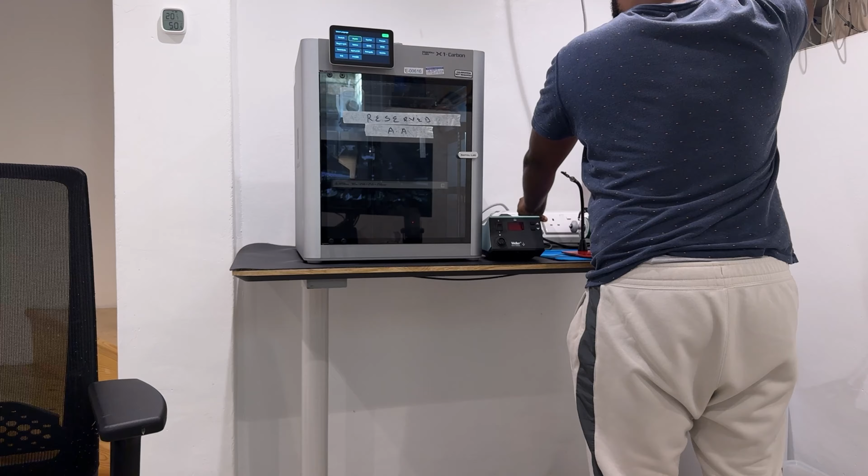So now we're just about done with the setup. You can kind of see the scope of what I've been able to score. So I've got a Bambu Lab X1 Carbon. And then there's also a Weller soldering station there. There's a multimeter and some other bits and bobs. So this will allow me to mess about in the basement a little bit and try and create some interesting projects coming soon. So right now, before we can start printing anything, we're going to jump into Onshape and design a chute for this 3D printer to collect the excess filament.

So it's all set up. So got a soldering station there, some solder, some jumper cables, a soldering mat, the mat and the table mat I bought on Amazon, the power supply. Initially, it was there, but it was a bit of a mess, so I've just moved a few things around. And then the 3D printer.

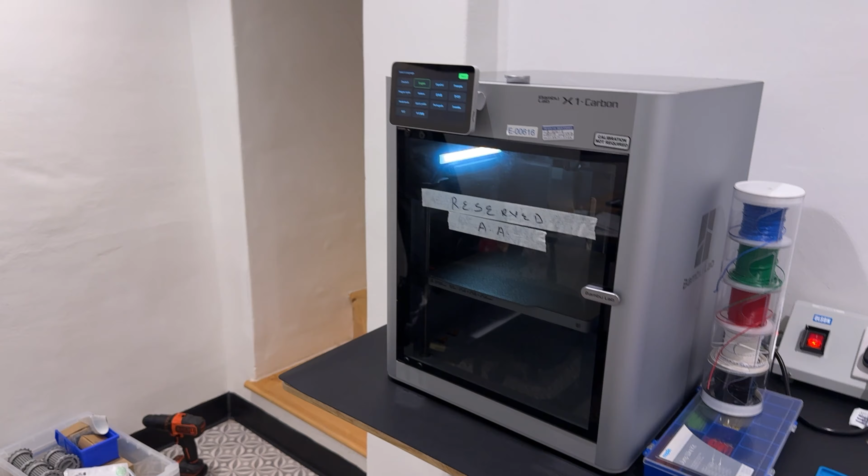So what I'm going to do now is set this up on the home network, but before this can run, I need to design a few things for it. I need to design a chute for the poop, for the excess filament that comes out of the back. So I need to design that, and I also want to design a bracket for this so it doesn't kind of flop up and down anytime I try to plug into it. So let's jump into Onshape now and do designs for this.

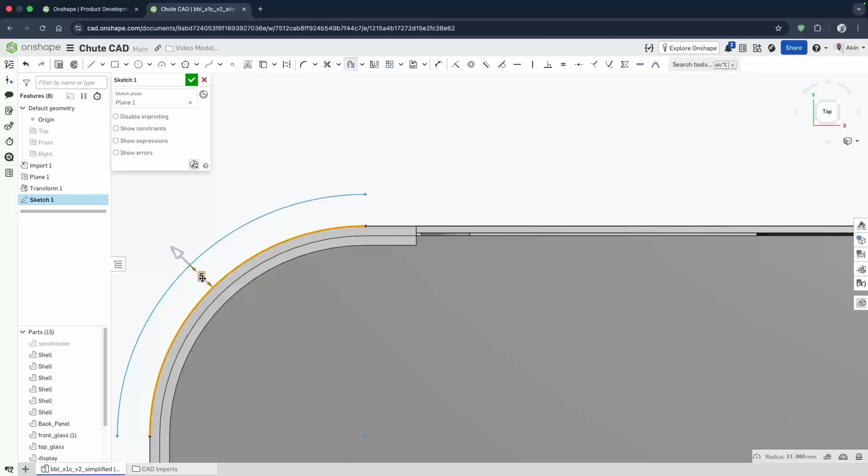In the meantime, I'm going to set this up so that I can run on the home network and fire up some test prints while we're designing in Onshape.

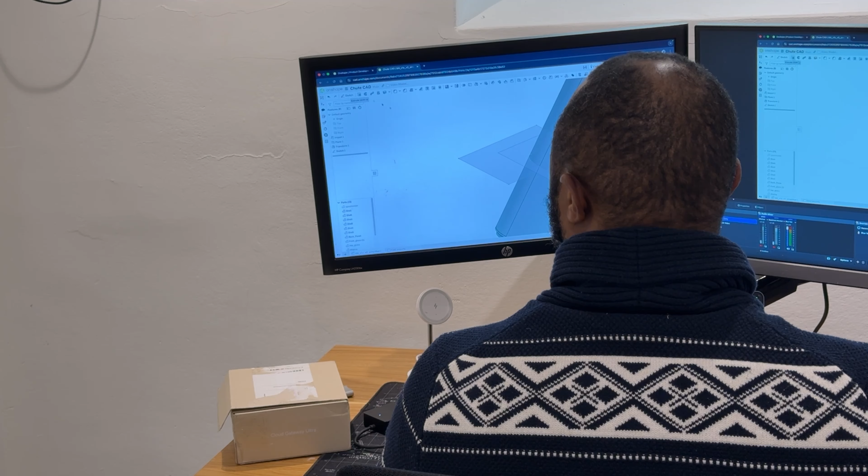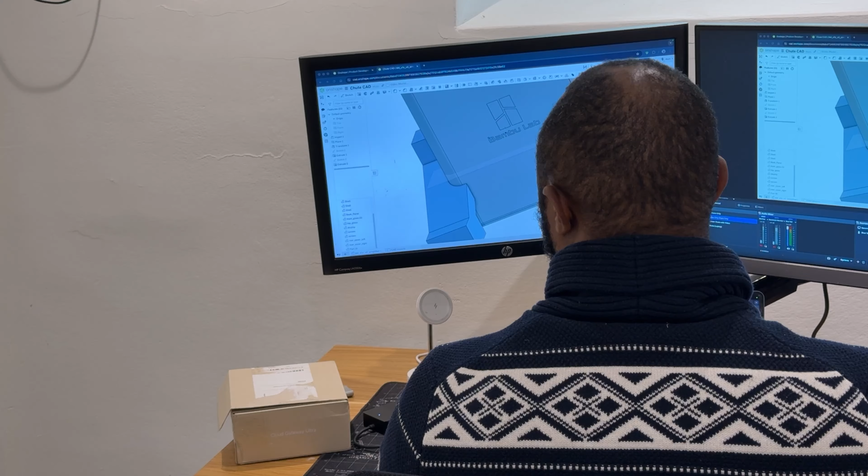So what you're watching me do here is create one of the 2 CAD designs that we needed to create for this new table setup. So this is for the chute at the back of the printer that collects the excess filament. This is, I would say, probably the least interesting of the 2. The CAD for the bracket for the power supply was actually a lot more interesting, as I applied a lot of the concepts that I've talked about in my previous videos in that. So stay tuned. That's coming along.

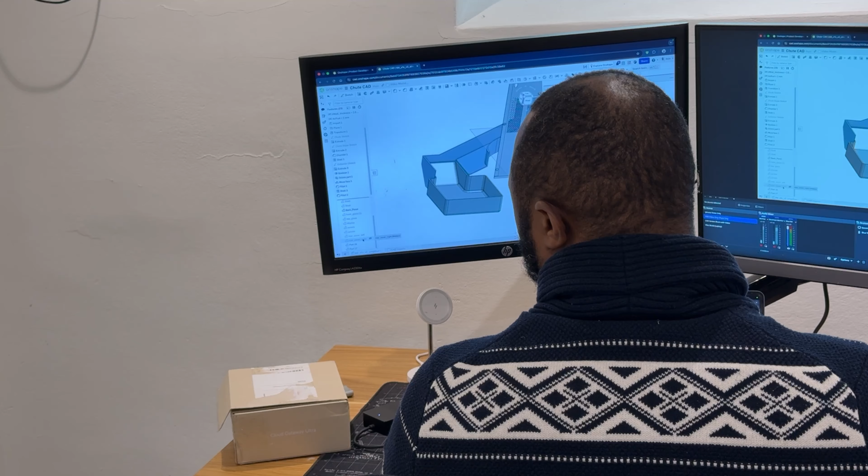But let me let you watch me vibe CAD these, as I was making a lot of it up as I went along here. I'm going to release a standalone video on this, as well as a standalone video on the power supply bracket, coming on the channel.

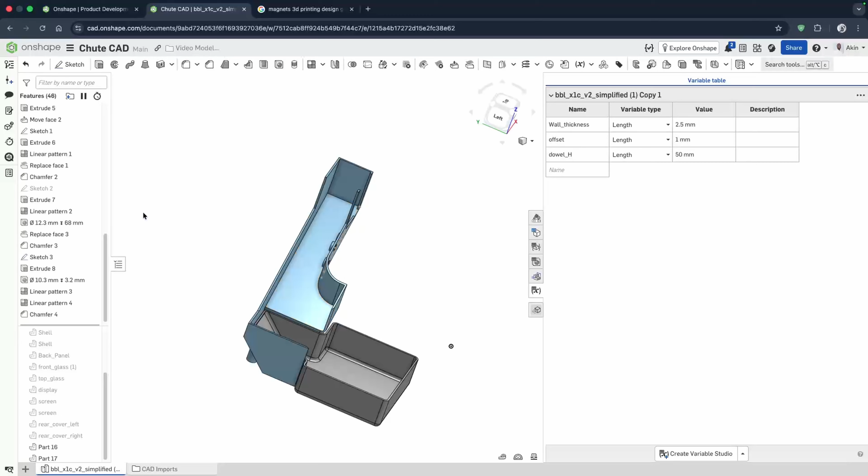But in terms of the design itself, what you're seeing here is just the 3 holes for the magnets that allow it to magnetically connect to the back of the printer. The design itself is in 2 pieces, so there's a chute part where the excess filament slides on. There's like a collector basket at the bottom of it, and there's a dowel pin right in the middle of the collector basket that aligns that properly.

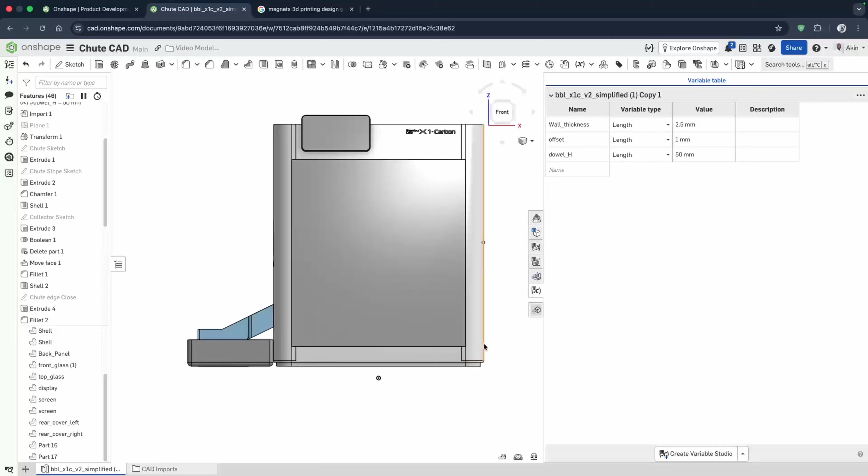One thing I'll say here is that perhaps the circular magnet hole is not the best. You probably want something that's hexagonal because of just how this prints, as there's a seam that makes the magnet always kind of difficult to go in. But at this point, I thought I was done, except

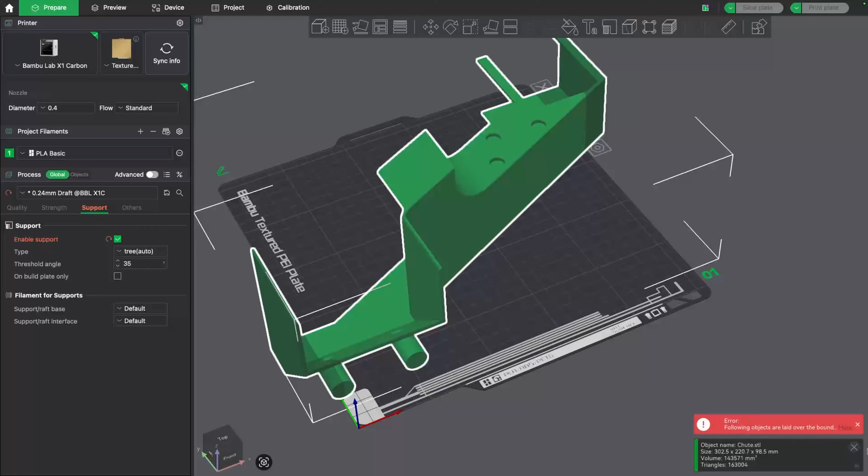I wasn't. So lo and behold, I put this into the Bambu slicer and then realized it's too big. I couldn't actually fit it onto the plate, which is one of the things I've begun to notice about this printer: it's actually quite small compared to the H2D out there, which is a newer model that Bambu Lab sells. So what I'm going to do now is jump back into the CAD and try and split this into two, and then print that as a two-piecer.

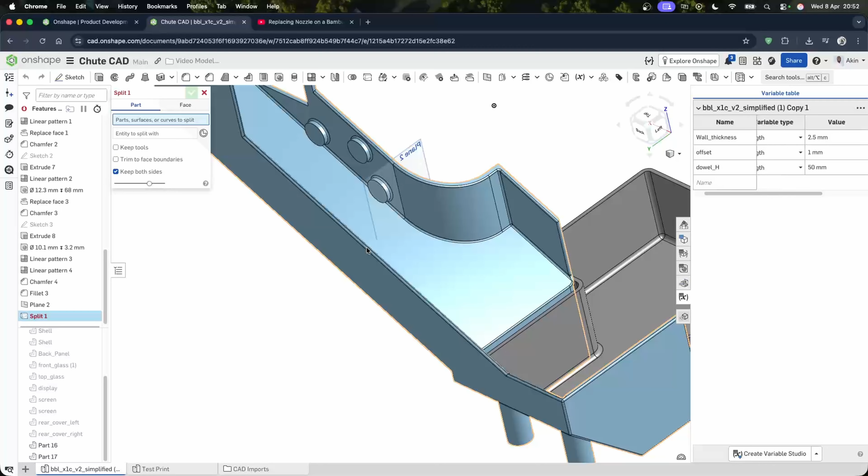So what I'm doing now is adding a plane to where I want this to split. I actually kind of like this feature with Onshape now where you can select what you want, and the system guesses what you're trying to do, because I could never figure out which options to select when I'm selecting planes. So now that that's done, I'm going to use the split part feature right here, using the plane as a split point to split that part into two.

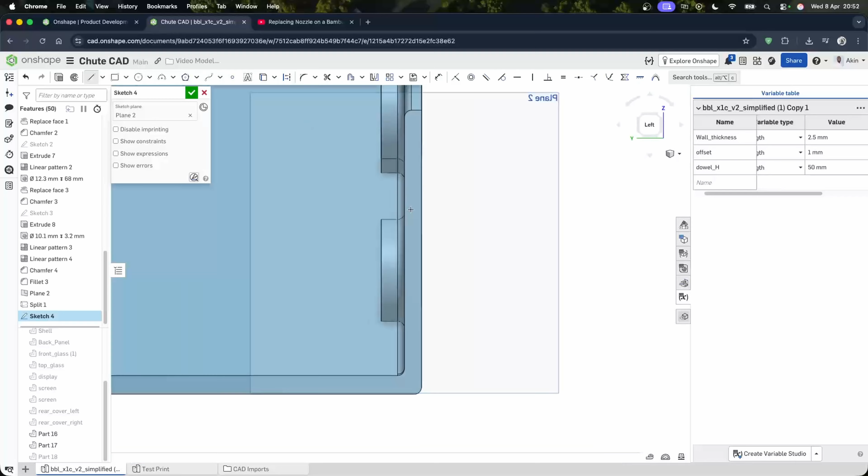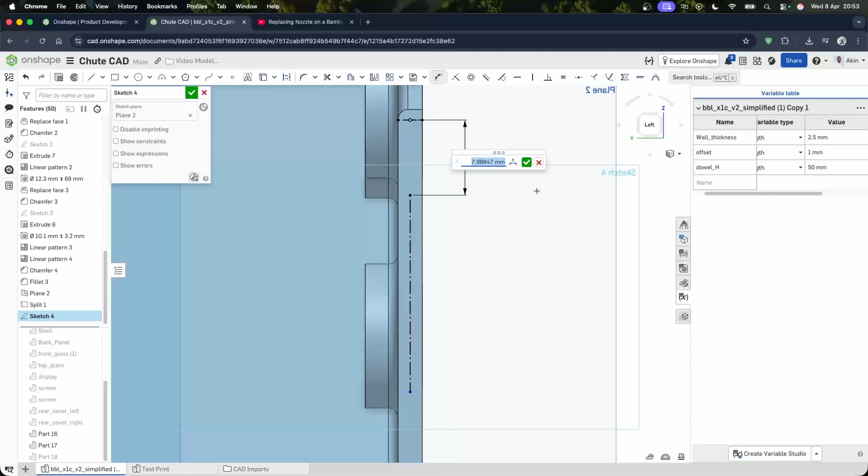So the next thing I'm going to do is put a sketch on that face. I'm creating a slot here, like a dowel slot, so there will be a male on one side and a female on the other side, which allows me to join this together temporarily until I'm able to glue it. So it serves as the attachment point. So I'm creating that geometry now, and then constraining and dimensioning, as I always say on this channel.

I'm watching you. Constrain your sketches. I don't want to see no blue dots, no blue ticks, nothing on your sketches, unless they are like letters, alphabets, other things. In that case, it is acceptable for you to not constrain your sketches.

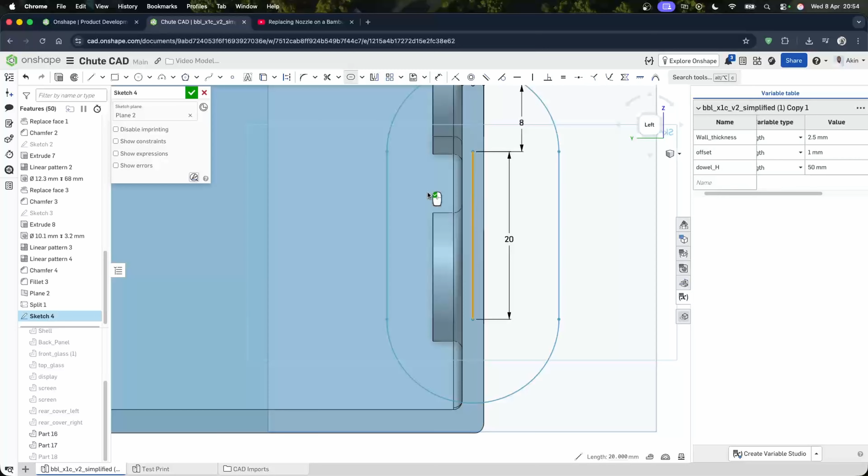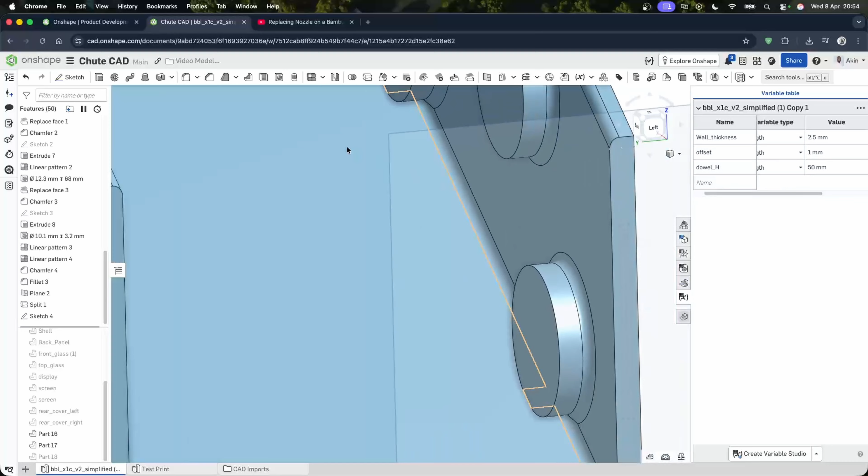So right now, I'm going to make this line a construction line. I'll do that a bit later. I'm putting in the dimension of the slot here. So it's just a very small slot. As I mentioned, it's just a joining point for this. So now that line is going to be a construction line. Then I'm going to exit that sketch and then extrude remove this right from that surface inwards.

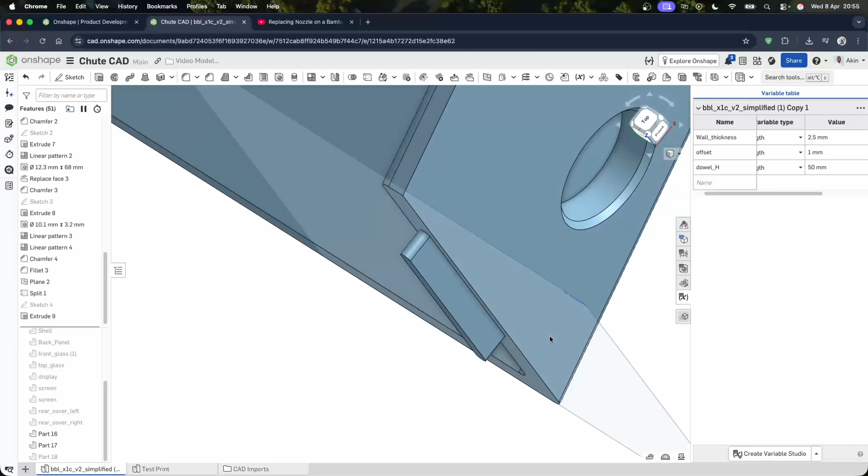One thing about the way the plane was created is that it's actually created parallel to the part. So I'm checking here that the plane is actually parallel, so it's not going at a different angle to what was already there. And that's just because of where the plane was created. It was created perpendicular, or normal, to the face that I want it to be. So whatever I'm creating will always go in the direction of that face.

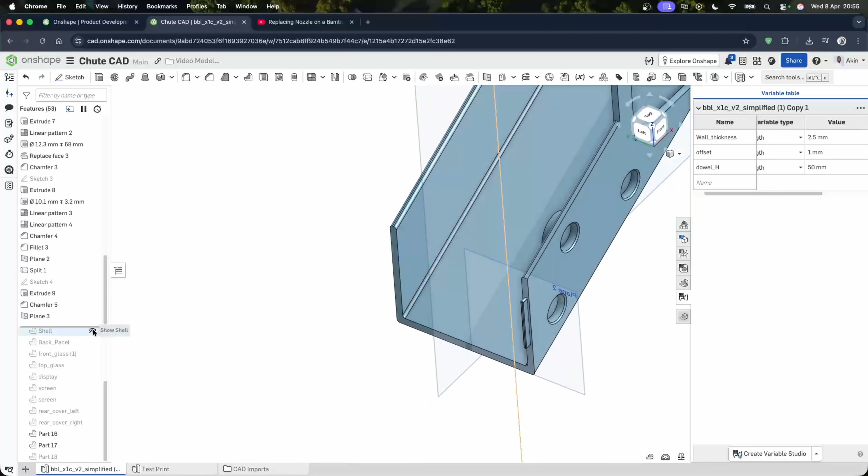So right now I'm just adding a chamfer. I would go back later in the model and redo this, by the way, but that's where we are at the moment. So now I'm creating another plane for the midpoint between the two edges, and then I'm going to mirror that feature that I've just created. So I'm going to select the feature mirror here, select the chamfer and the extrude, and select the plane, and then that mirrors that to the other side. So now I've created the male part of the joining feature.

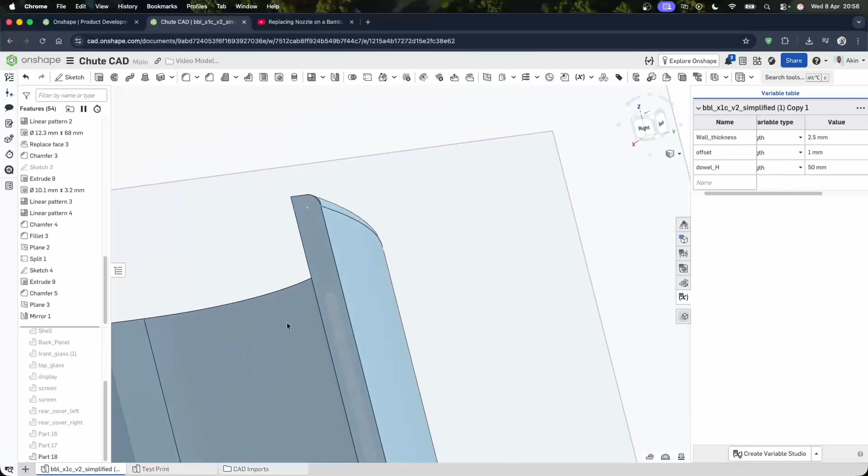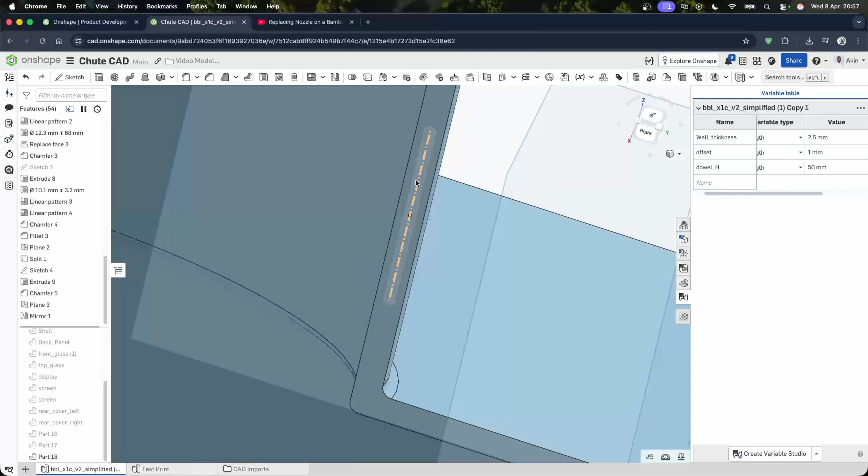So what I'm going to do now is hide that part, and because the plane is the split point between the two parts of the chute, that plane is automatically reflected on the other part. So now I'm going to create the female part using the same plane and the same sketch. I'm just going to extrude remove this to create the female part, and it just needs to go in just deep enough for this to be usable, because as you can see, there's a curve going around there. So I don't really have that much space to get this to go much inwards, but there was just enough space in there for me to create the pocket for this.

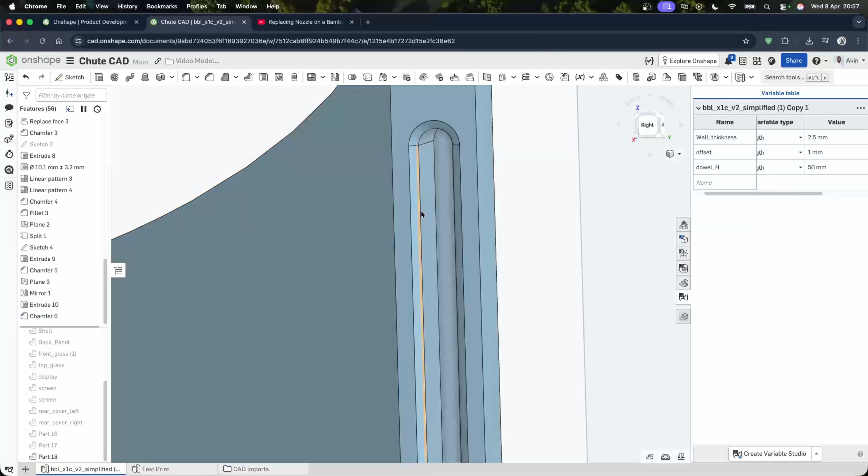And I'm going to do the same thing here, add a chamfer, and then I will also mirror this to the other side using the planes I've already created. And that's kind of the beauty of this, isn't it? That I don't actually have to redo this, because all of the planes were created in place and where I want them, so it can just be used on both parts of the chute.

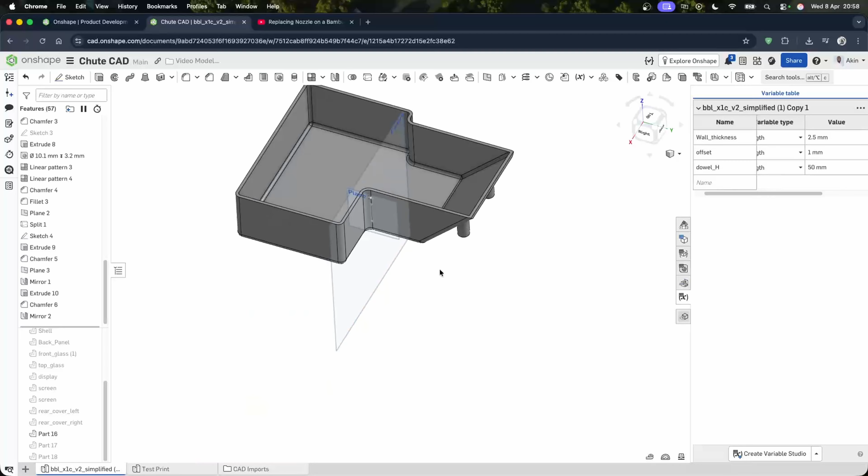So now that that's done, I think at some point I decided that, because right now it's size for size, one of those holes needs to be bigger than the other. Either the male is smaller than the female joining portion, or the female is bigger. You get what I mean? So I'm going to go back now and think about the best way to do this, figure out how to either make this smaller or make the corresponding slot on the female side bigger.

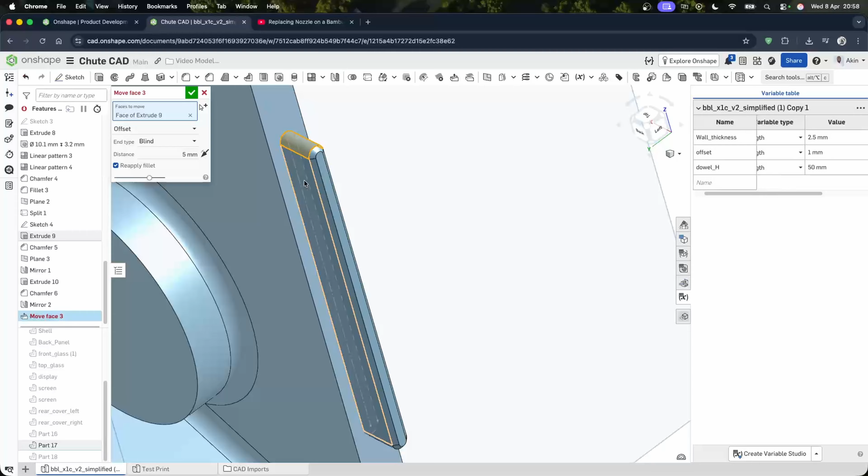So I think initially I wanted to take the lazy path and use the move face feature, which I actually don't like. I remember when I started at Dyson, they used to tell us never use synchronous features, because that's what these are called, to change features. You want to go by sketches. So I changed my mind there and decided I'm just going to edit the sketch.

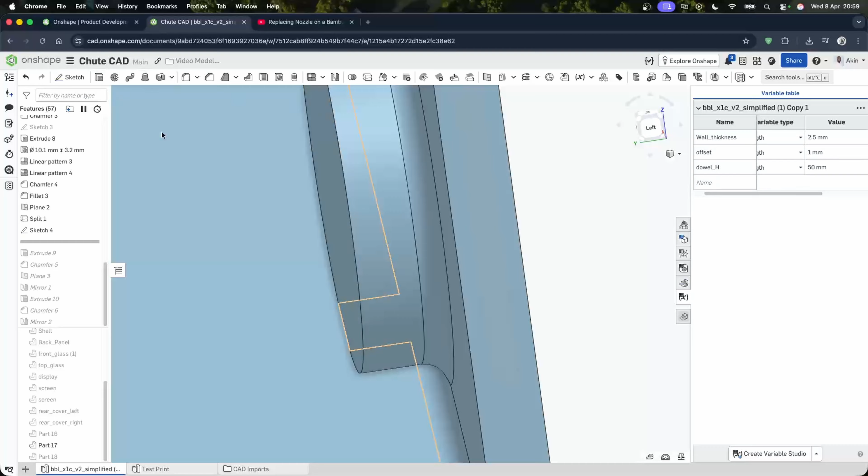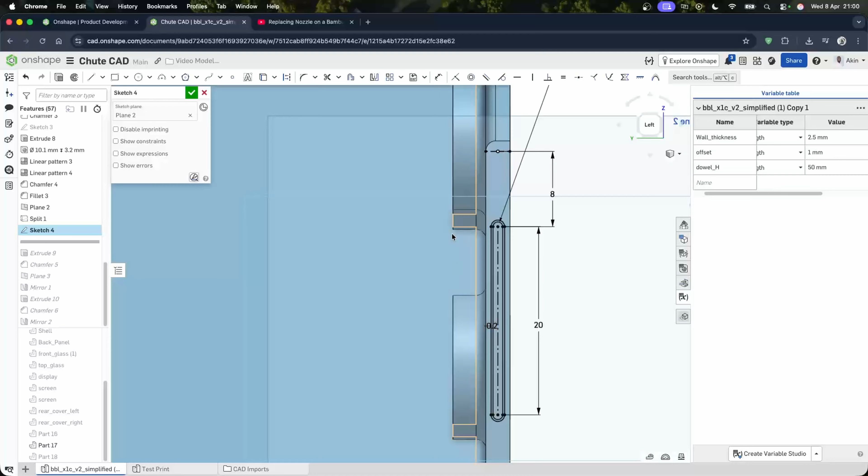So what I'm going to do is go back and offset my original sketch. I think I chose about 0.2 here. Offset that by 0.2 and then use the new, bigger offset sketch to create the extrude remove on the female part. So I'm going to roll that back. I didn't do any more changes to this extrude other than just re-add the chamfers, I think.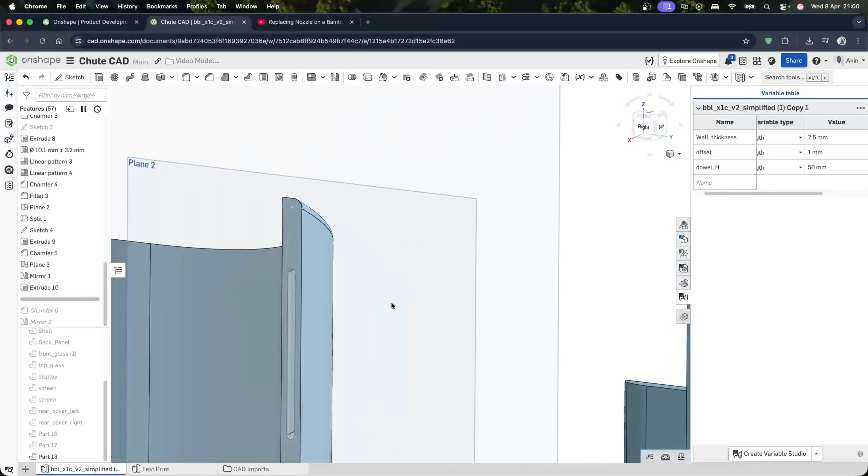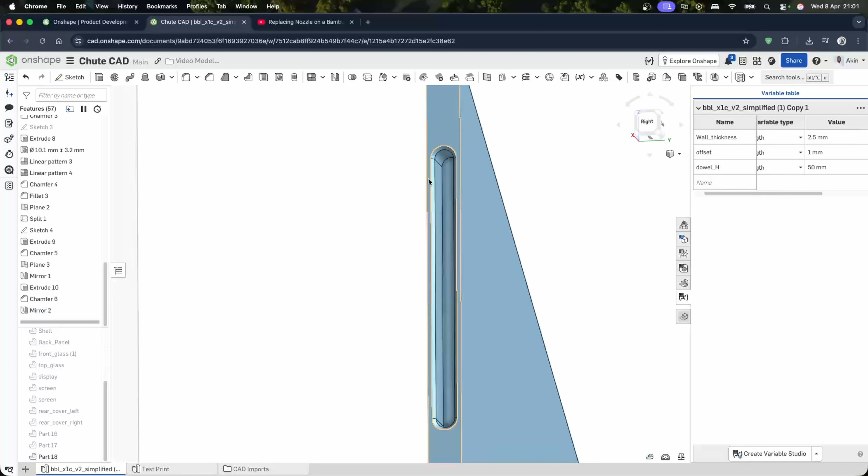Roll that all the way back to the bottom, and then I'm just going to hide it now and move on to the other part. And then update that extrude to use the initial sketch and also the offset sketch to make that all bigger. As you can see here, the chamfer disappeared because the reference was missing, so I re-added that. And because that's a mirror, it should automatically transfer to the other side of the chute without me having to do anything. And that's exactly what happened.

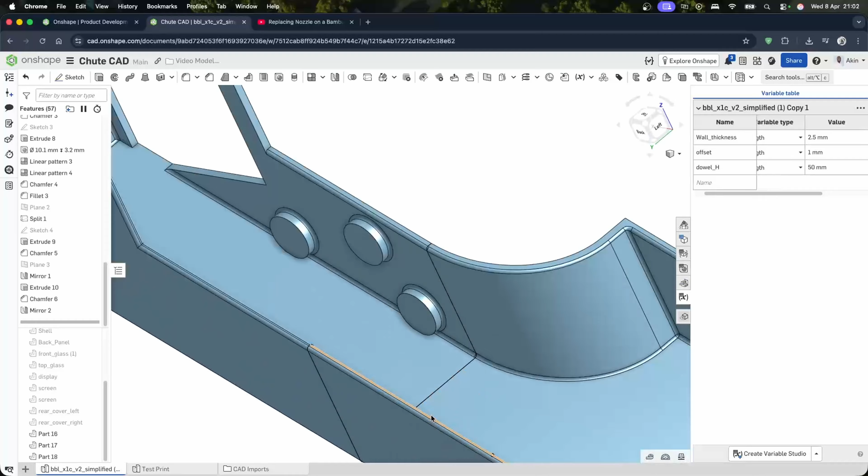And just like that, this part is just about done. I didn't do any more changes on this, and it's ready to be sent for printing as a 3-part design, 2 for the chute and 1 for the collector basket. I did some tweaks on the connector bracket to make it a bit smaller because I realized I didn't need it to be that big. But other than that, this was pretty much done. And look out for the standalone video of this to go into more of a deep dive on this design.

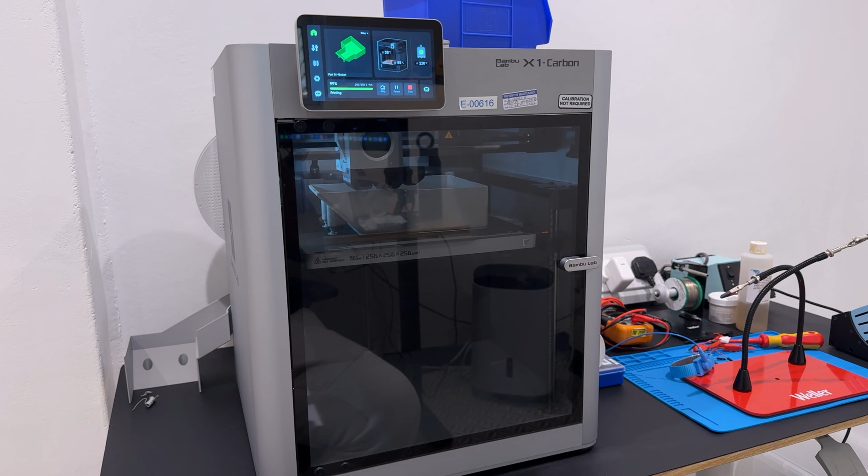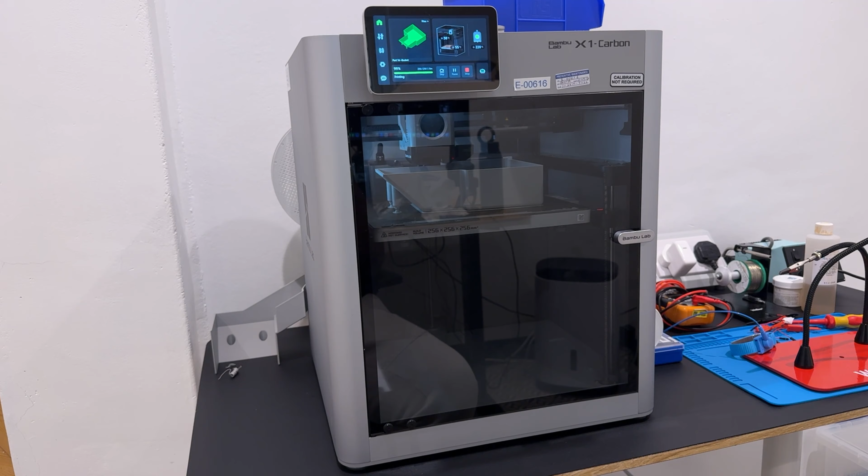So this is the print of the collector basket finishing right now, and you can see the dowel pins that I mentioned earlier. So the 2 dowel pins at the bottom of the slanted part there, which connect to the 2 holes on the chute part itself that's already printed here. You can see a bit of excess filament sliding down on there.

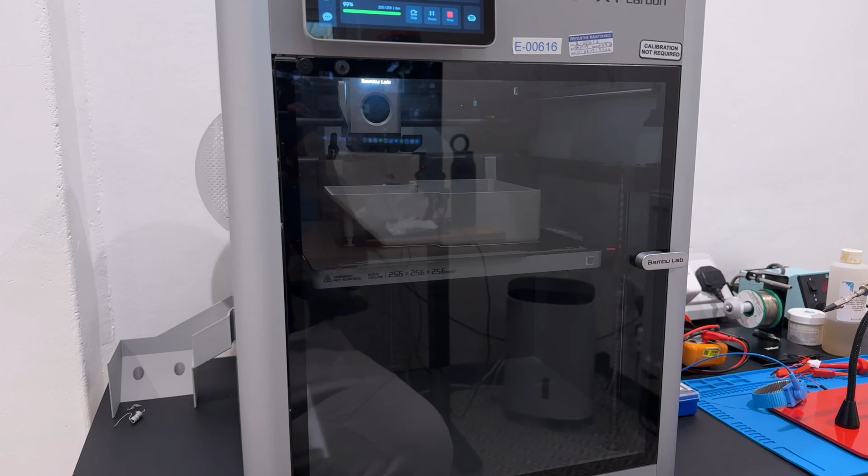The dowel pins are not strictly necessary because the collector basket was lying on the side anyways, but I think it needed a bit of a foot to get it to sit on the mat. And I just thought I'll add that as part of the design. It really didn't hurt or improve it in any way. But overall, drama-free print, and this is me just testing it out, and what I want to hear, really. Nice fit. And just like that, the print is done.

So now we're going to move on to the design for the bracket for the power supply, which was actually a lot more interesting, as I mentioned.

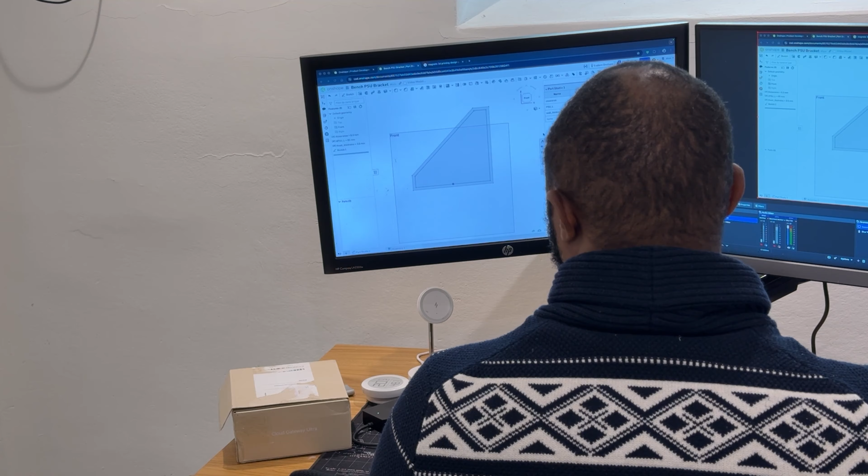Perfect. So what I'm doing right now is just setting up the initial sketches for the bracket part of the power supply. So I took some measurements of the profile of the benchtop power supply, and what I'm doing here is just the beveled edge of the table. But as I mentioned, a lot happened there, right? There was a lot of testing and a lot of things I had to figure out.

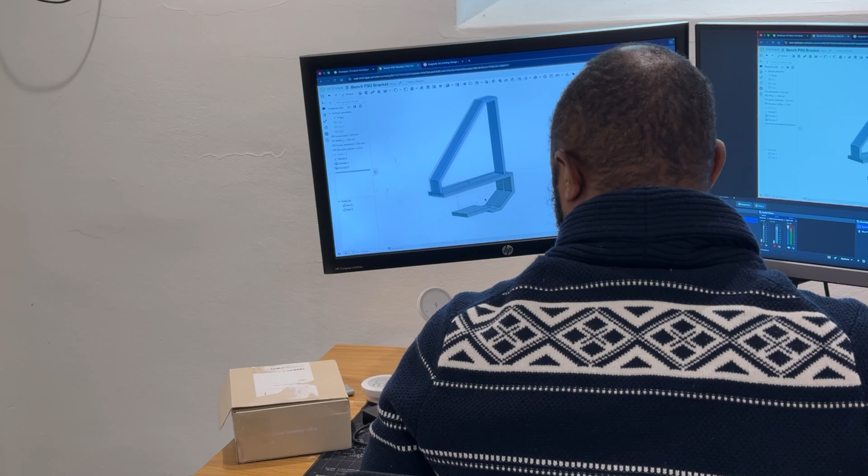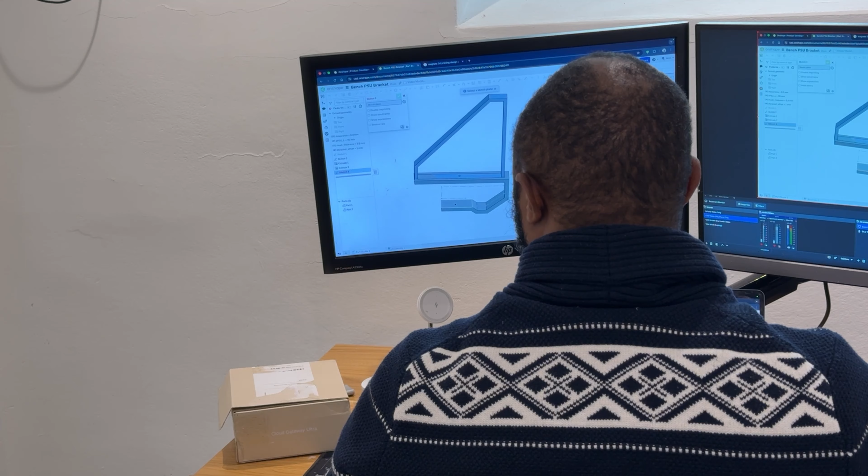So I'll also be releasing a standalone video of this, detailing and giving a deep dive of a lot of the concepts that I did to ensure that we had a good design. But for now, here's the final design for the benchtop power supply, and look out for the follow-up video on this. So this is the final design of the benchtop power supply bracket.

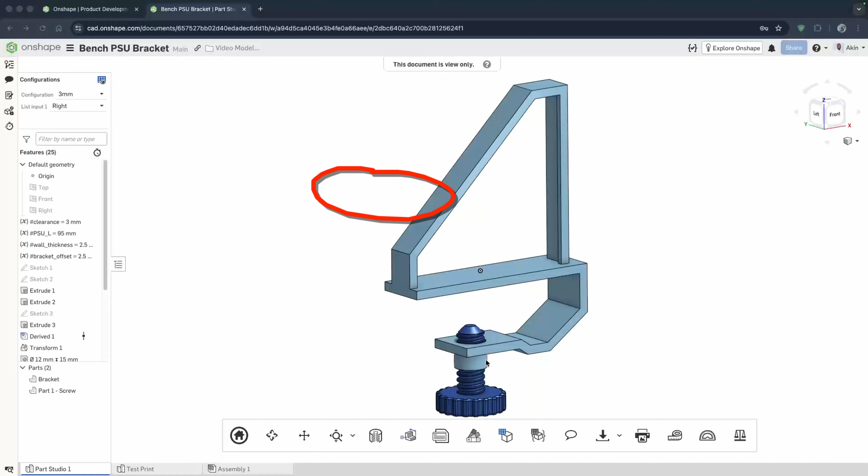This is actually the more interesting CAD challenge compared to the other one, as I had to introduce a lot of concepts that I've covered in my previous video. As you can see, this is in 2 parts. So there's the main bracket that follows the beveled edge of the table that it's going to go onto, and there's also a screw part down here that's actually a remix or a reuse of a previous model that I've covered on this channel.

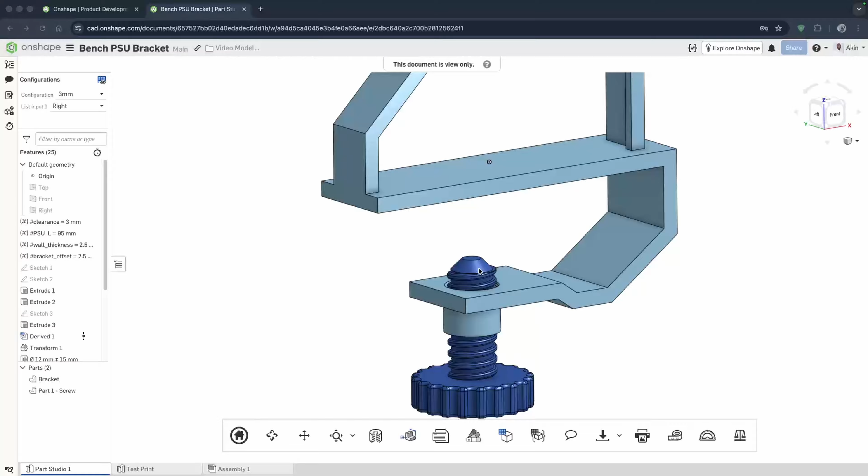So I will actually show you. I brought that model into this part studio and used it to inform the design and create features with it within this design here. The eagle-eyed among you might have also noticed there's a shoulder here, so that implies there's a right and a left side of it, and you'd be correct.

So using configurations within Onshape, I was also able to set up a right and a left side of this all within the same model. So I'll also cover that in the standalone video. As you can see, it's kind of updated there, and I'll do that again. So keep an eye out for that video. But for now, I need to send this to the printer. So let's get this printed and installed and finish the installation of the prototyping desk.

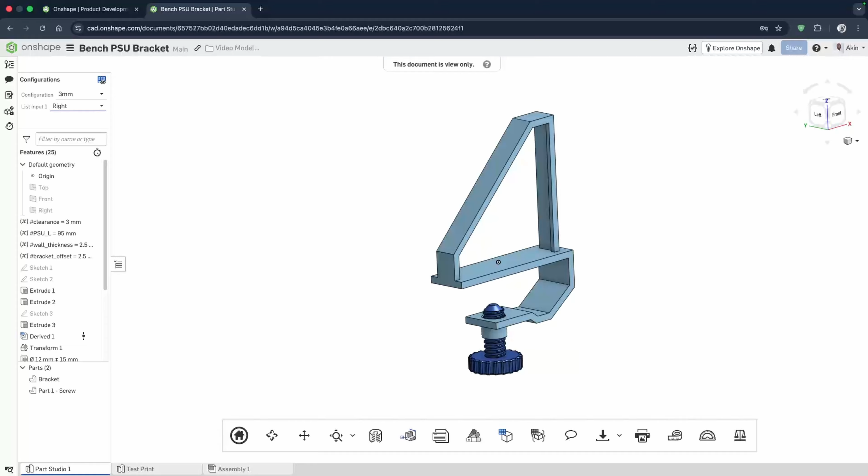So after a couple of touchy moments, because at some point my prints decided to not adhere to the bed plate, I finally was able to get the brackets printed. At some point I had to remove the printing plate and give it a soap bath, and got lost a little bit in the weeds of print settings and plate settings. But overall, it came out okay, and behold, the final review of the desk. So I've left a teaser here of the kind of projects I'll be working on.

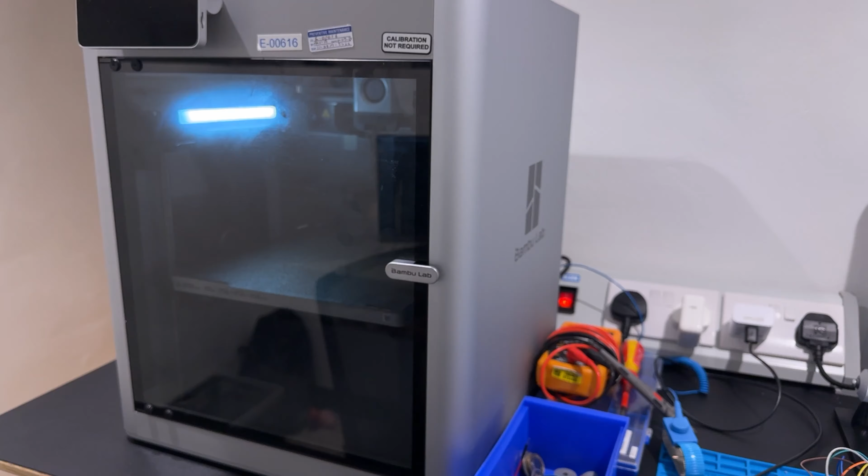But as you can see here, you can see the bracket at the edge of the power supply in there, holding it nice and snug, and you can see the screw underneath. There are probably better designs out there. It's probably not the very best, but in medical devices, we have a saying that says if it's good enough, it's good enough. So we're just going to roll with it for now. I might need to do some work on cable management underneath the desk to make it less of a mess, but that's not for today's video. But overall, the setup is done, it's completed.

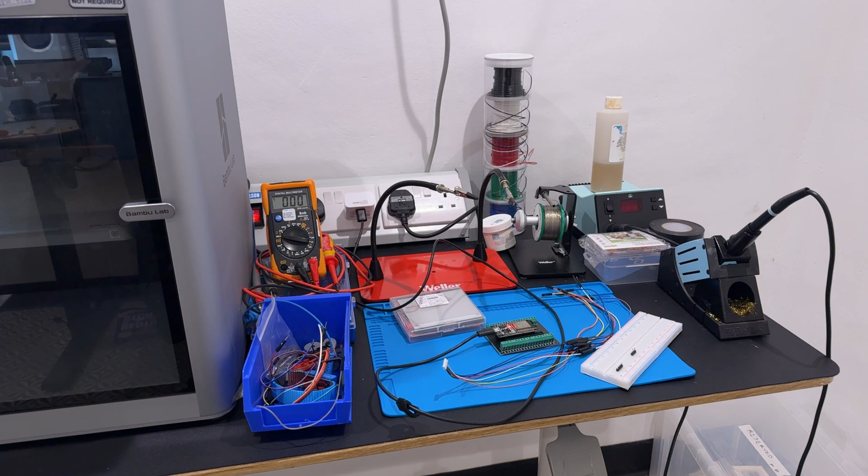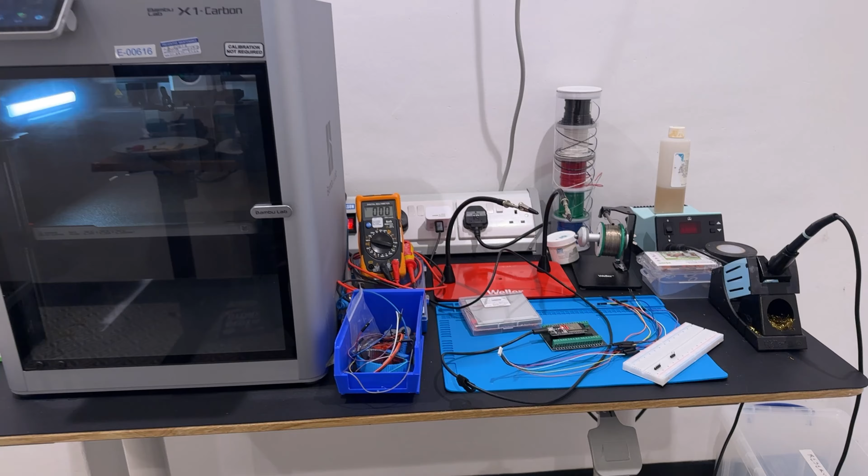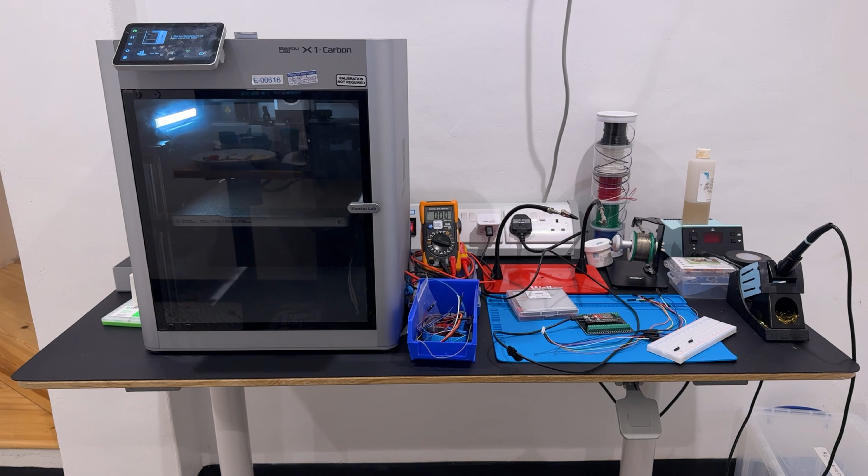Looking at this table though, I wish it was longer. I was hoping I'd get some more shelving on the desk, to the right of the soldering station as you see there, but that's an issue for future hacking. Perhaps I'll just change the tabletop and keep the base, but stay tuned. If anything changes, I'll let you guys know. A couple of things I still do need is an extractor before I can start soldering on this table here. I'm crazy enough to think I might want to design one myself. I'm thinking maybe a concept that can magnetically attach to that metal base, but it's in my head.

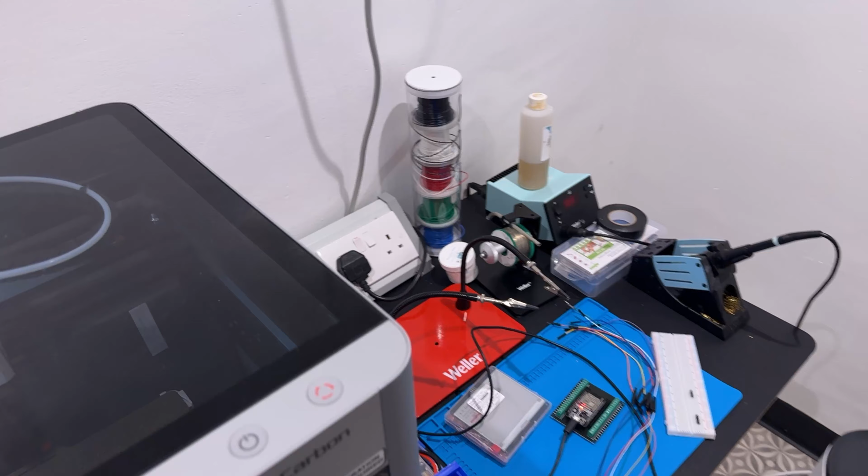One thing I do want to design though, that I'm actively working on right now, is a storage solution for my filaments, kind of like an AMS Lite, but without all of the fanciness of the AMS. Perhaps something that can give me the humidity state of the filaments in the box, and also the status, how much is left on each filament. So I have ideas about using ESP32s and e-ink displays to achieve that. So keep an eye out for that on this channel.